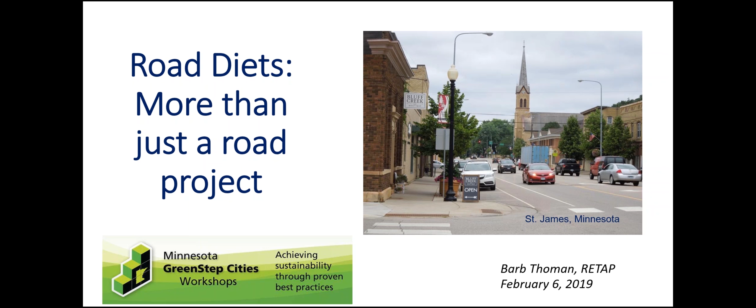We are going to hear quite a lot from Leuer about what a road diet is, but just very briefly, it's any time you're either reducing the number of lanes or reducing the size of the lanes, shrinking down the configuration of the road. The ones we're going to really talk about and dig into today are the 4 to 3 lane conversions, where you're going from 4 lanes typically to 3 lanes, so 1 lane in each direction and a two-way center left turn lane.

And most of the roads where this treatment makes the most sense are your lower speed roads. So the 30 to 35 mile an hour roads, 25 mile an hour if it has a bike lane, but in a commercial corridor, a small town main street.

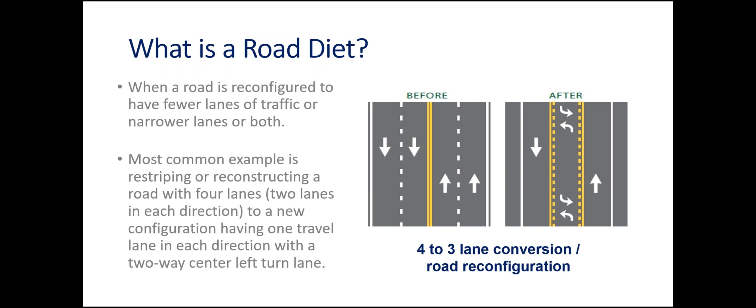So we've probably said the phrase road diet 10 or 20 times already this morning, but I'm going to try not to say it again, because who likes a diet? Nobody likes a diet, and a diet conjures up an image of taking things away, of scarcity, and what we found around the state, in Minnesota at least, is it's not been a helpful term. Up in the northwest part of the state, MnDOT District 2, the phrase road diet was really almost a toxic phrase in the public engagement work up there.

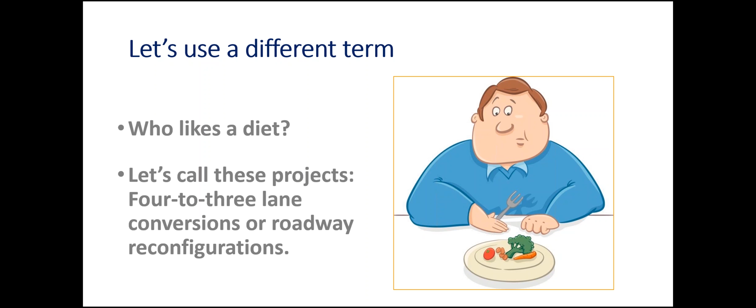So we're going to try to call these, using a more descriptive term, a 4 to 3 lane conversion or a roadway reconfiguration. I think it was actually Jack Broz from the city of Richfield who was the first person to say road diet is not a helpful term. So, all right, change our language. Moving on. Oops, that was not what I wanted to do.

Well, the reason I'm so interested in these, and the GreenStep Cities program is interested in these projects, is that these road conversions have such a great array of benefits. So enhanced safety for all users - that's drivers, that's people walking, that's people biking, that's people using some kind of mobility assistance device.

In small towns where a road is 4 lanes and you're trying to cross 4 lanes of traffic, the road can become a barrier to people in your community getting from one side of the street to the other, getting from home to shopping, getting from the bus stop to school. And so we're seeing that these projects have a great benefit in just getting more people out walking in your community and in a corridor.

And the other thing that sometimes we don't think about, but Phil did mention, is this idea of increased economic vitality. When people feel safe walking and biking, when there is a place along the sidewalk or a wide enough sidewalk for social interaction, for shopping, for mingling, your business district often does better.

And so we'll hear some great information from a couple of greater Minnesota cities where the 4 to 3 lane conversion has really helped to revitalize Main Street.

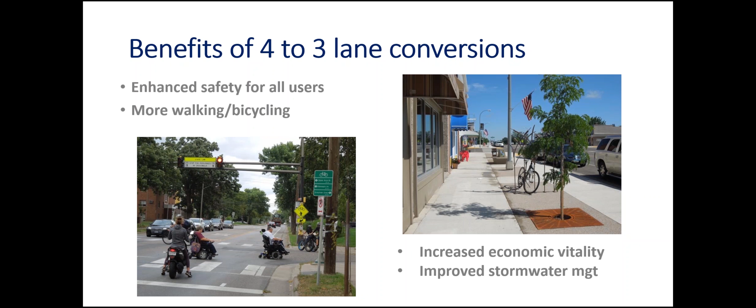And then finally, many of these projects, if they're more than a mill and overlay, if they're a full reconstruction of the road, often provide the opportunity to redo utilities below the street—new water infrastructure, sewer infrastructure, stormwater infrastructure. So many communities, when they've done one of these major roadway reconstructions, really think about what they want to do differently with stormwater to improve a wetland area, a stream, or a lake in town.

So this is my final slide before we really dig into the nuts and bolts of a road diet, or a 4 to 3 lane conversion. See, it's very ingrained—so used to saying it.

I think what we found is there are a lot of candidate projects out there across the state, and there's probably a project in your community, in your city, on a county road, on a MnDOT road. And that's because for many, many decades, when we thought about road projects, we thought bigger, faster, better.

We want to keep the cars moving. We want to make sure that they don't have to slow down at rush hour. And what we found is in some of our corridors, the amount of traffic that we thought was going to occur in the future hasn't come to pass.

And I looked at the MnDOT website the other day at the vehicle miles traveled and their estimates of traffic across the state. It was really quite surprising to me—vehicle miles traveled per person has been flat for nearly 15 years.

So that's the amount of—if you take the population of the state, you look at all the miles that are traveled in the state, and you make that division, you'll find that the number really has not changed. It might have bumped up and down just a little bit, but it's pretty much flat.

And the growth in traffic, the vehicle miles traveled overall in the state, is up less than 1% a year over the last dozen years. And so I remember when we were doing planning and evaluating projects when I was on the Metropolitan Council's Transportation Advisory Board, we were using a growth in traffic number that was over 2%.

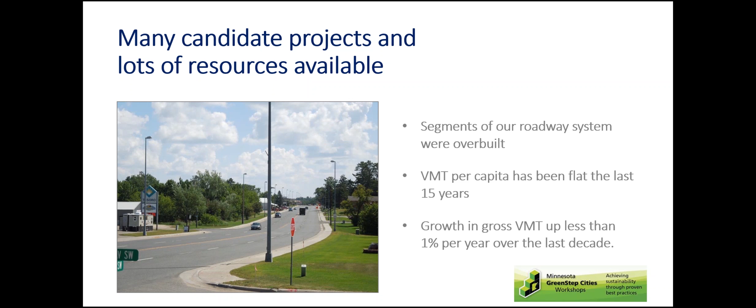So anyway, something to think about as you watch these presentations. So I'm going to move to our first two speakers.

Next up, talking much more about the nuts and bolts, is Derek Leuer, who's a traffic safety engineer at MnDOT, the Department of Transportation. He's going to talk about operation, safety, and performance. And right after him, we have Greg Pace, who's a design flexibility planner at MnDOT, and he's going to talk about performance outcomes, flexible design, and context.

So, next up. All right. Welcome—this is your clicker. Thank you, Barb. The advance, and... all right, the arrow is missing. Am I in view of the camera? Am I good? You're fine.

All right, sounds good. All right, well, good morning, everybody. My name is Derek Leuer. I work for MnDOT in the Office of Traffic Engineering. I'm a traffic safety engineer. So part of my job is that we administer the crash database for the DOT, so we get access to all the crashes. We do a lot of crash analysis.

The other big part of what we do is we are in charge of the Highway Safety Improvement Program, which is a federal core program that has about $36 million a year, and we help divvy that out to the MnDOT districts, counties, and cities to help implement safety projects across the state.

One of the big things we've been promoting and trying to get the word out about, and trying to help support Barb and some of the other states and counties and guys like Jack out there, is the 3-lane road reconfiguration. Barb brought up the connotation of the diet, and I was actually going to share that same thing. I was at a Federal Highway Administration workshop, and one of the guys talking about 3 lanes said they went to a city and proposed the 3-lane road diet, and it blew up on them because everybody in that town had a negative connotation of a diet.

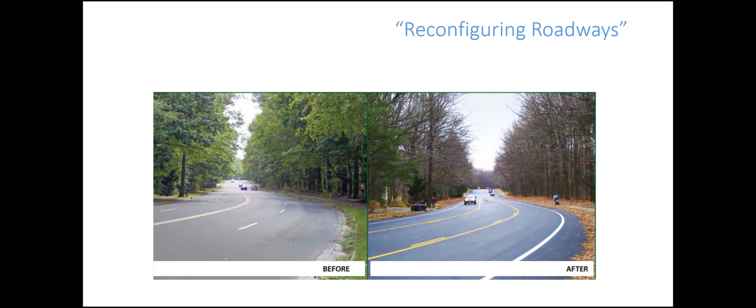Nobody likes going on a diet. So I'm probably going to repeat a few things Barb already said, but this idea of a diet is real. So if I say road diet, I'm trying to include road reconfiguration as well. It's just that essentially redistributing the pavement is really what we're going after.

So what is a road diet? Road diet, road reconfiguration is kind of a vague term sometimes, a blanket term. Typically what we're probably talking about most often is this idea, as Barb mentioned, of going from 4-lane undivided down to a 3-lane cross section, 1 lane in each direction, and a center left turn lane.

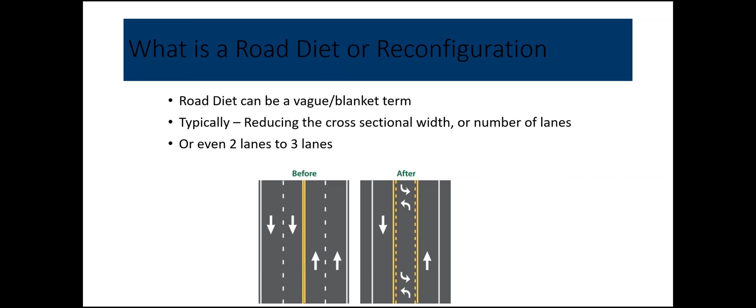Typically, the idea is reducing the cross-sectional width, or generally the number of lanes, going from that 4 lane down to 3 lanes, 2 in each direction down to 1 in each direction. But sometimes it can even be 2 to 3 lanes. This 4 to 3 lanes is the most common you probably think of.

But there's also some cities we've gone through and looked at that have a nice wide cross-section used for parking, skateboarding, biking, motorcycling, horse riding, buses, tractors, semis, cars, plus sidewalks on top of it. Some areas we've gone through have super wide cross sections, and they've only got 2 lanes, but we've made the suggestion to maybe use 2 of those lanes, then add that 3rd lane to eat up some of that extra space.

There's a lot of different things you can do. There's also this idea of just going 3 lane to 3 lane, where there are some 3 lanes built probably in the 70s or 80s that have really wide lanes and really wide cross sections. We can even slim those up sometimes too when we come through and reconfigure.

And now this is catching on in some spots: 5 lanes to 3 lanes. Barb talked about this idea of traffic projections, where we project growth for the next 30 years expecting 35,000 vehicles on a road eventually, but come back 35 years later and it's still at 10,000 or 5,000. We can go from 5 lanes down to 3 lanes. We don't need all those 5 lanes, we really only need 3. So can we take some of that width out, take away those lanes, and still have a cross section that works really well for what we need?

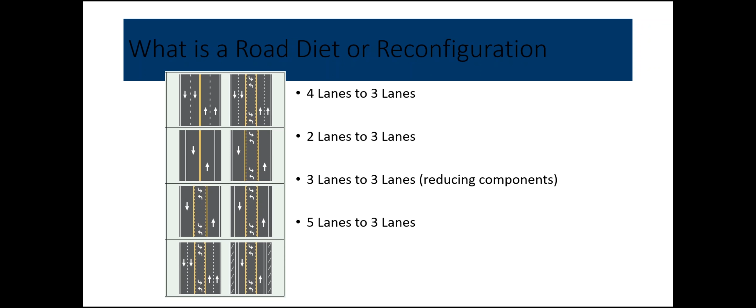So why consider this? We talked about what you can do, but why should we do this? I'll be honest, I took this right out of the Federal Highway Road Diet Manual: road diets have the potential to improve safety, convenience, and quality of life for all road users. And I'll emphasize 'all' - that's important.

Road diets can be relatively low cost and planned in conjunction with reconstruction or simple overlay projects, since applying road diets consists primarily of restriping. So really, we've already got this section out here, we've already got that width, it's just a matter of redistributing the pavement.

I'll talk about safety here, but I just want to highlight this. One of the big benefits of road diets is that if you're driving down a 4-lane cross section like this and you're just trying to get through, how often is it that somebody stops in this lane to turn left? You've essentially decapacitated that lane while that person waits. If traffic volumes are heavy enough, they're going to sit there and wait a long time, and nobody can use that lane. Everybody starts jogging across, switching lanes, jockeying for position because nobody wants to stop and everybody wants to keep going.

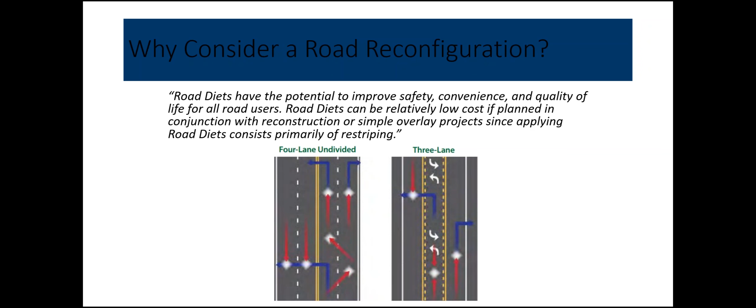So that's one of the big reasons why safety performance increases when we do this. Instead of jockeying for position or incapacitating this lane, people move over, they're out of that lane, and they can wait there safely for the right gap to make that maneuver. And when they do turn left, they've only got to cross one lane instead of two.

One of the other metrics we use to know we're improving safety is this idea of reducing operating speeds. A lot of 4-lane undivided cross sections in urban areas typically have an operating speed somewhere between 40 and 45 miles per hour. Once you go down to the 3-lane, you typically see that drop to about 35 miles per hour, sometimes even lower. Combine that with narrower lanes, pulling in shoulders, adding medians at strategic locations, and you can see big reductions in operating speed.

If you're a pedestrian trying to cross this road, not that getting hit at 30 miles per hour is a great thing, but it's certainly better than getting hit at 40 or 45 miles per hour.

This idea of reducing the chaos - when people are switching lanes and jockeying for position trying to get around each other, it's this turbulent chaos on the road, and it lends itself to rear-end collisions, side swipes, pedestrians getting hit, people going off the road and hitting other items. When you go down to the 3-lane, you reduce that chaos. There's just less chaos.

Another big thing: shorter distance for people to cross. When you have to cross 4 lanes of traffic going 45 miles per hour, that's quite the distance to go. With the 3-lane, you can actually use that third lane as a refuge if you need to - you only need to cross one lane, wait if you have to, and then cross that third lane. So it's a shorter exposure.

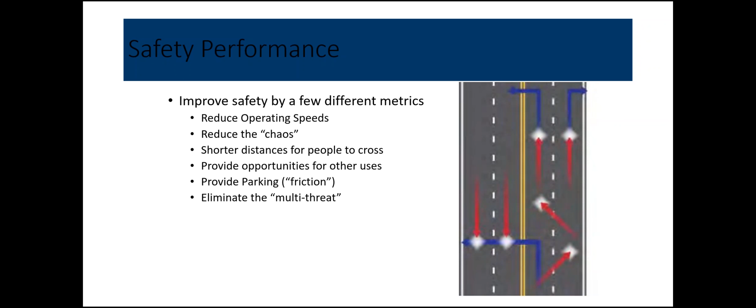And when you go to the 3-lane, you get rid of this thing that's called the multi-threat, and I'll explain that in a little bit here.

So what have we seen at the state? When we looked at our trunk highway network and where we've got 4-lane undivided versus 3-lane cross sections, we've noticed a difference in the number of crashes. FHWA reports a 19 to 47% reduction in crashes on 3-lane sections versus 4-lane undivided. 47% is a pretty substantial number, a big reduction in crashes for just moving some paint lines.

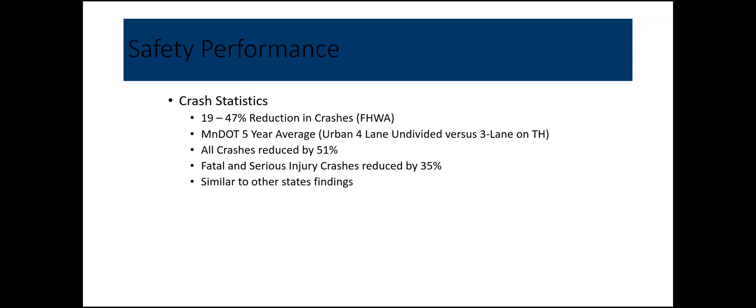When we looked at urban 4-lane versus 3-lane sections, we've seen crashes reduced by about 51%, which is pretty substantial. More importantly, fatal and serious injury crashes, which is our state performance measure for safety, we've seen a reduction of 35% from 4-lane undivided to 3-lane on Minnesota trunk highways. This is pretty similar to what other states have found. We're not outside the normal band of what other states and the federal highways have been finding. So it seems pretty consistent that if we're using these in the right applications, you'll see the crash reduction and the speed reduction as well.

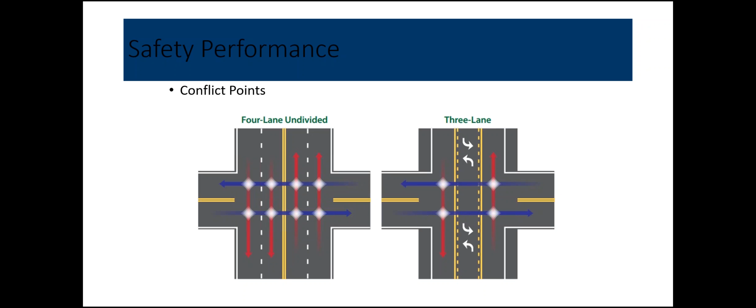Some of the reasons for that relate to this idea of conflict points. On a 4-lane undivided at an intersection, you've got at least 8 conflict points. If you start counting left turns, right turns, rear ends, and those types of things, you probably explode up to, I want to say, 42 conflict points. When you go down to the 3-lane, you greatly reduce those total numbers. So every conflict point you get rid of is an opportunity for a crash removed.

So there's some speed and operations management benefits. It can improve flow, crossings, and manage speeds. It can improve all of those. The biggest benefit is we get rid of that — we can get those left turners out of the way. Usually the left turners are the ones who take the longest time because they have to wait for the traffic approaching them.

It reduces the distance and complexity of crossings, and as I mentioned, reduces speed differentials. One of the big things traffic safety people tell you is that speed itself isn't what's dangerous, it's speed differentials. On a lot of these 4-lanes, if it's posted at 35 miles an hour and everyone's really going 45, because that's what the road is telling them to do, you'll always have that one person who follows the speed limit, going 35 while everybody else tries to get around them because they're going too slow. That's when speed differential creates a lot of problems.

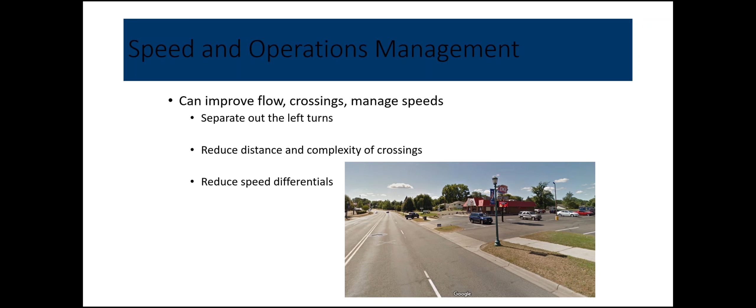And if you're a pedestrian trying to cross this road and somebody just went by you at 35 miles an hour, you gauge how to cross, and then somebody comes along at 45 or 50 — now you've got problems because the brain isn't adequately wired to know how to cross that road until it's too late. So when we get down to that 3-lane, we get more consistent speeds, lower speeds, and it's easier for pedestrians to cross, and for vehicles pulling onto the road as well.

So where do these work? Certainly we can't just go restripe I-94 into a 3-lane, that doesn't make sense. There are places where it works well and places where it may not. Typically, urban corridors, urban streets, and city streets are really good candidates. They work well up to about 18,000 vehicles per day, which is a pretty high substantial volume. Seattle has put out guidance that they're willing to go up to 25,000 vehicles a day. I haven't personally seen how well that works, but Seattle's comfortable putting that number out there, and as far as I know, the world hasn't exploded, so it could work.

Even for MnDOT, 18,000 vehicles is a lot of your streets — it's probably most cities, most counties, that's probably 100% of your roads. Even at MnDOT, 90% of our roadways fall into that category of 18,000 vehicles a day or less. So even a lot of our roads can benefit from road diets or road reconfiguration.

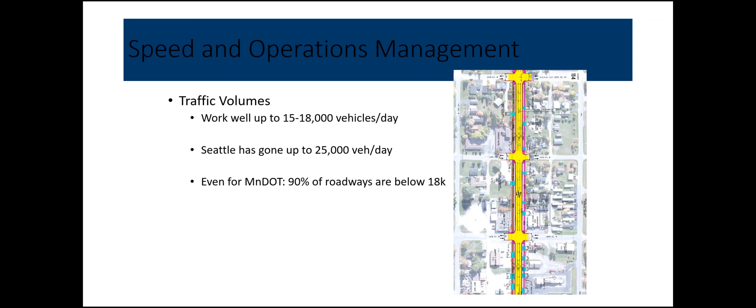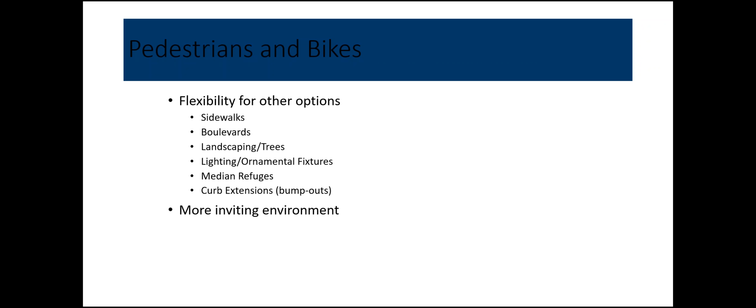So as I mentioned, pedestrians and bikes get flexibility for other options. We take away some of that pavement, we can redistribute it, but we can also do things now like sidewalks, boulevards, trees, lighting, ornamental fixtures, median refuges is pretty big, and then curb extensions as well, which are these bump outs you can put on the intersections to help narrow down things to make people slow down. And then just overall a more inviting environment for people to enjoy.

So this idea of multi-threat - this is kind of one of the big reasons why pedestrians really benefit from a 3-lane. So if we have a 4-lane undivided section, what happens is you got people driving down the road and this guy wants to cross, right? So he kind of makes that gesture that he wants to stop, and you get a good driver every once in a while who will stop, right? And they stop and they wait for this person.

Now this person starts crossing, and they sometimes are under the assumption that if this guy stopped for me, everybody else will stop for me, right? And what often happens is this person starts crossing, and this person is close enough to where they've completely blocked all the lanes behind them. And this guy here could either just be going along and not knowing why this guy stopped.

You know, people do a lot of stupid stuff on the road - 'I'll just stop on the road, I'm just going to go around it.' So either they're coming along not paying attention, or even sometimes they're coming along and they see this guy stop, they jostle over to this lane and they fly through.

And that's right when this person has walked into that lane. So the person does not know another vehicle is coming, and the vehicle that's approaching does not know that there's a reason why that vehicle stopped. So this is really, if you read a lot of pedestrian crash reports that have happened on 4-lane sections, this is the story. This is what happened.

So when we get down to the 3 lanes, you can't have this anymore. People will not jostle into that 3rd lane to go around anymore. So it provides a better environment for the pedestrian as well. Anybody have any questions on that?

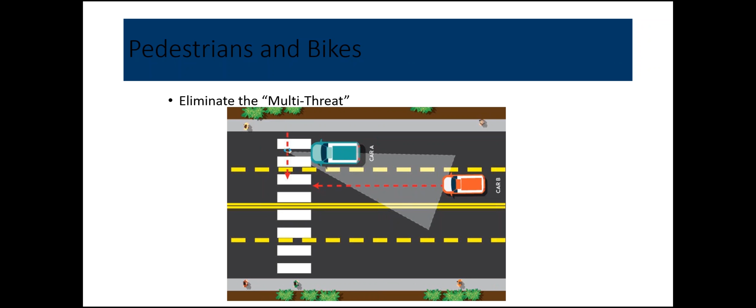Totally. Okay, so I'm just going to talk quickly about some costs and opportunities and some funding options as well.

The nice thing about road reconfigurations is that they can be extremely low cost. It can really just be a matter of moving your striping around. It can be a matter of just hiring a contractor, or even your own maintenance forces, going out, grinding up the existing pavement markings and putting down new pavement markings. It really can be that simple. But it's not always exactly that simple - it may require moving some signing around to better position the signing.

The other thing too is if you're in a signalized corridor, you sometimes have to move those signal heads to a better position over the lane. So there are some other costs that can come with it. Sometimes it is just as simple as moving the pavement lines, but it can be more.

Typically at MnDOT for planning level costs, we kind of estimate about $50,000 a mile to grind up those pavement markings, put down new pavement markings, and then do some of that signing and striping that might have to come along with it too. If you got turn arrows in the road, you got to grind those up, you got to move them around. So there's just some cost associated with that.

That's kind of the high level cost we use. And then for every signal that you cross, plan on adding about $40,000 per intersection to move those signal heads. Another part of that too is going from 4 lanes to 3 lanes, the way the traffic moves has changed, so you may need to retime your signals for better operations - but that's kind of included in that $40,000 per signal cost. So a couple mile roads with a couple signals on it, maybe $200,000. Certainly a realistic cost, not insane.

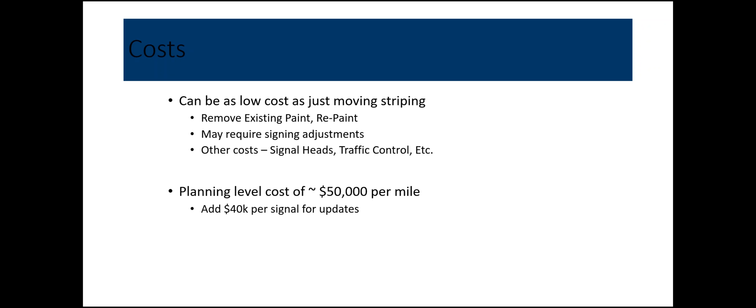Some other opportunities you should really think about: if you have a mill and overlay coming up, which is grinding up that top inch of pavement and putting down a new inch of pavement, that can be one of the best opportunities because you have to put the pavement markings down anyways when you're done. Now it's just a matter of saying, where do I want to put the pavement markings?

So if you're doing a mill and overlay, the cost of going from a 4 lane to a 3 lane is pretty much incidental. The pavement rehab needs to occur anyways, and usually it can be done with pretty short planning and engineering time. The project I helped out on was Lake Elmo, Highway 5 out in Lake Elmo.

We did a road safety audit the year before a chip seal, and we recommended going from the 4 lane to the 3 lane out there. For the maintenance forces that were going to do it, it was simple enough to just say, instead of putting the yellow line here, we're going to put 2 here. They did it in about a week - they switched the plans out for what they were going to do.

Barb mentioned reconstruction. If you're doing a reconstruction where you're actually tearing out the old road and putting in a new road, this is really the opportunity to do the right thing, to really change how that road is going to be used and operate. Don't miss this opportunity - this is the chance.

This is the time to do some more substantial things too that are probably pretty much at the same cost of just putting back what's there, because you need to put back sidewalks, you need to put back curb lines - it's just a matter of where you're going to put them. So these are more substantial improvements like sidewalks, boulevards, medians, bump outs. You could probably do these all for about the same cost as doing the reconstruction anyways. It's almost at no cost, just because we're putting things in different places.

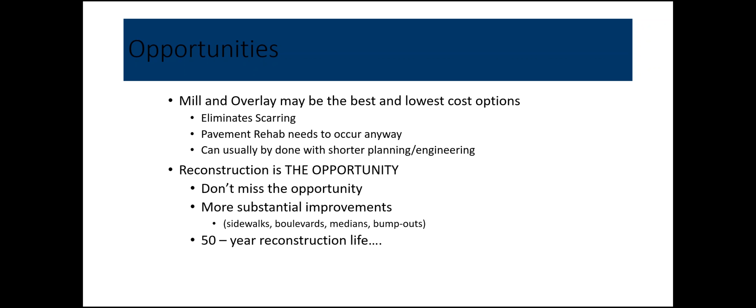Some other funding options as well: you can kind of do these as part of your normal capital improvement program within your city, county, or state. Mill and overlays are every 7 to 10 years - those can be good opportunities. Other pavement rehab things can be good opportunities too. There's a federally administered program called the Transportation Alternatives Program that may provide some good opportunities for funding as well.

The program I help administer, the Highway Safety Improvement Program, we have funded 3-lane conversions before, but typically it's been mill and overlays - we just cannot afford to fund a full reconstruction. So we have limited funding, but it is an opportunity we are looking to leverage. If you're doing a mill and overlay and would like to get a little bit more money into your pot, a 3-lane conversion could be a good opportunity that we would certainly be willing to look at, at least.

Some real quick resources as I'm running out of time. Sonia Pfeiffer at MnDOT, I work right across from Sonia. Sonia is our bike and pedestrian safety engineer. She's been going out across the state trying to find good opportunities to do things like this. So if you have questions, she can be a good resource.

Will Stein at the Federal Highway Administration is a good contact as well. There's this FHWA Road Diet Informational Guide that has a lot of good information. I'll be honest, I stole most of my presentation right out of there because it is a good guide. We have a little website that's all about road diets, and Barb's case studies are on there as well.

And there's this really good little video on Vox right now about the 3-lane, it's kind of the history of the 3-lane and how they work really well. They even talk about some of the reasons why we went to 4 lanes in the first place and why it's not working, and then why the 3-lane is a good solution. So it's a little 6 or 7 minute video, but it's pretty good.

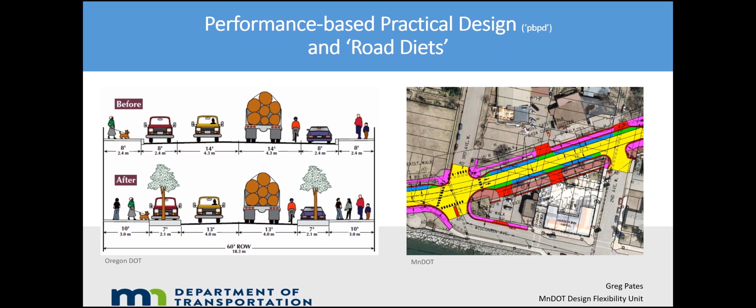So PBPD is the shorthand for performance-based practical design, and we say we use a complete streets approach. Basically, this is about getting the best bang for the buck at all levels across the highway system, from across the state to across town to down the street and probably down the alley in the case of communities. The second part of this is about trying to achieve desired outcomes. Derek and Barb talked about some of the outcomes of road diets, right-sizing, safety and performance outcomes for everybody, not just for people when they're driving cars.

Part of the approach that we talk about and are using in training that we do, both at the state level and helping people at the county and local level, is talk about flexible design using a complete streets approach. I'll get into that a little bit more. But keep in mind that what I'm talking about here, even though it's maybe more state-focused, really is applicable at all levels and all jurisdictions.

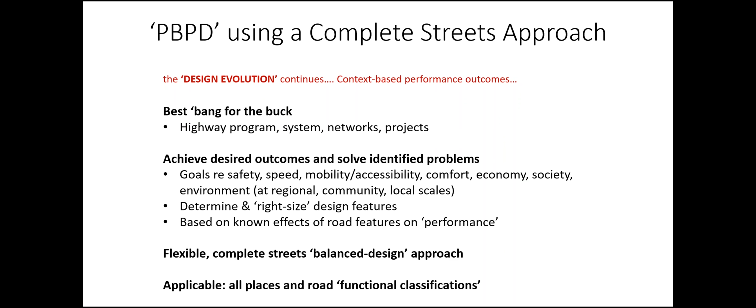So, performance outcomes—here's one way of looking at it. Part of what I'm working on right now is helping to revise planning and design guidance at MnDOT, including updating the MnDOT Road Design Manual. One of the things we're trying to help with is to broaden the understanding of what performance is about and what outcomes we're trying to achieve, using that as part of the framework for how we do things now and in the future.

Especially from a complete streets standpoint, the outcomes on the left come almost straight out of the complete streets legislation. We're trying to make it so that people of all ages and abilities can get to their destinations reasonably safely, efficiently, and comfortably, no matter which way they choose—whether they want to walk to where they're going, drive their car, or whatever it is.

And then, based on Minnesota statutes, there are also other goals that help us dive deeper into this, or help set some priorities in terms of what some of the priorities might be in these outcomes we're trying to achieve. At the bottom, but not least, includes things like increasing walking, biking, and transit by giving highest priority to modes with the greatest people-moving capacity.

So I talk about this sometimes as, at least for MnDOT, this is our job description. In a sense, it's like the short checklist for people when they're scoping projects: is your project going to achieve these things? Can you check off the box and say yes, this project will do that? If you can't, then you probably need to circle back and think again about what you're doing and why you're doing a project to begin with.

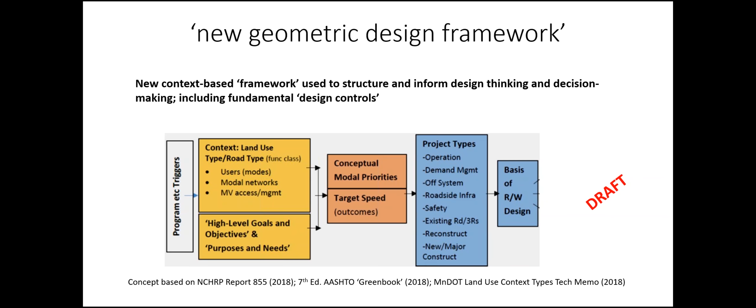Lastly, just a few considerations. It's probably fresher in people's minds right now with the snow and ice—operation and maintenance is a big part of trying to achieve outcomes. In the middle of summer when it's 90 degrees, we don't think much about snow plowing, but it's an important factor in finding the balance in best serving users and achieving outcomes.

Again, context is king. I've talked about how AASHTO and MnDOT are embracing and using this. The three things I think are important to consider are trucks, tractors, and snowplows. They all provide challenges, especially for state highways in urban areas and communities. Trucks and tractors do need to get through, but they don't need to get through quickly—they don't need to be the king of the road in a sense.

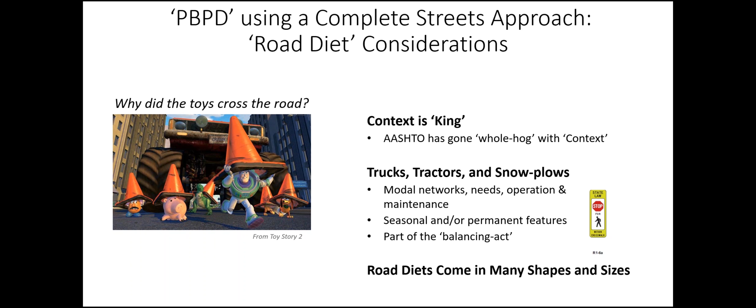Again, my name is Jack Broz, transportation engineer for the city of Richfield. City of Richfield, if you're not aware, we're not a big community—36,000 people. And those of you in a city of 36,000, you have a city engineer, you maybe don't have a transportation engineer. So I'm going to be talking about several things unique to Richfield, more holistically.

By the way, this is our Public Works logo—sweet streets, better roads, better Richfield. Do you have a sense of our mission at Public Works? It's much more than the street we're talking about, it's about the city itself. So I'm going to talk about how that's changed our entire vision of our community, how we get there, what is our vision of Public Works as part of that puzzle, and I will get to a three-lane street.

I don't know if any of you read City Pages—last year they listed Richfield as the best burg. Two years running, we're the hottest housing real estate market in the Twin Cities. The hottest, Richfield.

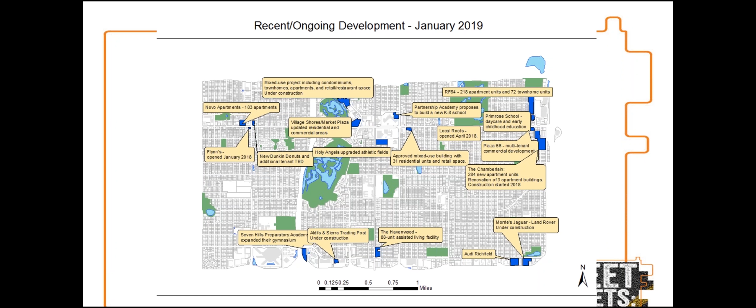So as we redefined who we were at Public Works, one of the things we talked about is, as a city, what's their vision? So we basically stopped all work and engaged the city. We went through a visioning process looking 50 years ahead—that's a number you should all talk about. It's 50 years; the roads we were going to reconstruct were going to be 50 years in the ground. So we brought together the council, our transportation commission, adjacent cities, all our commissions—human rights, arts—and had a visioning session.

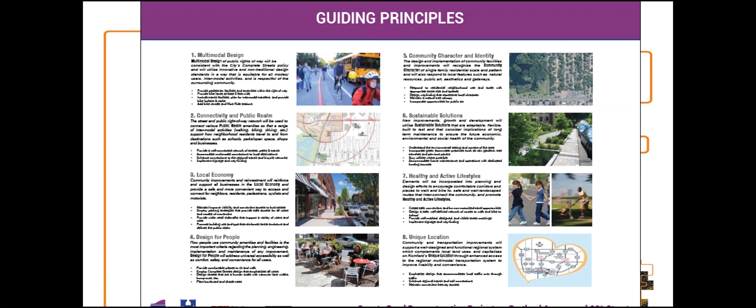Out of that came what we call the guiding principles, and these were then ranked by order. Let me show you what the ranked order looks like. Number one, multimodal design—the most important thing to advance the city towards its 50-year vision is effective multimodal design.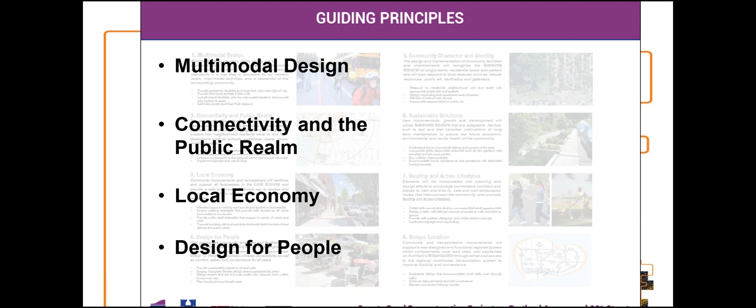Now, I'm the engineer, it gets a lot fuzzier at this point—I'm not the planner. Connectivity, the public realm, local economy, designing for people, community character and identity. Inside of there is public art, sustainable solutions, healthy and active lifestyles, fostering our unique location, which is next to the airport, minutes from downtown.

So as I talked about a second ago, the Transportation Commission. In this process, Greg talked about MnDOT. By the way, shameless promotion, there is training MnDOT offers on complete streets that I can walk you through in a more methodical way.

It's a process that methodically starts with taking your technical analysis, going out to the public, talking about the problem first from their point of view, not even designs. Our second open house, all we bring is a problem statement, and we ask, can you please verify that? These are maybe the things we could do. We don't even have a layout.

Then we bring in options. You weigh them, compare them, contrast them, and finally get to a preferred alternative that you bring to council. But in between, we have a commission, appointed by council, that evaluates all our work.

And you may not be able to read this, but it says the Transportation Commission recommendation to council. Staff does not make the recommendation. It's a citizen commission that makes the recommendation after all of that vetting.

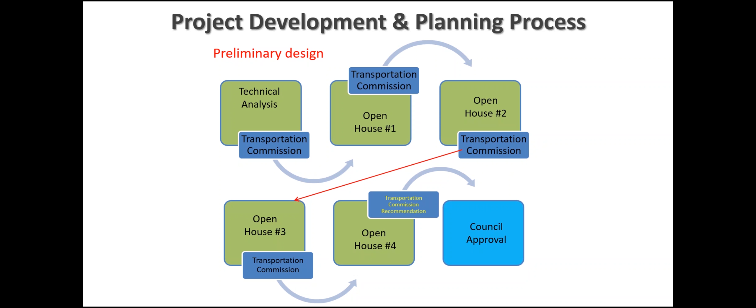So we redefined our process to this. In detail, we use checklists to achieve the multimodal goals. This is just how we look at pedestrian modes. I'm the engineer, so we make a nice checklist. When we look at a design, which is going to be better for pedestrians? Here's a way to measure it.

I'm not going to read them all, but speed of traffic, cars, offset to traffic, crossing distances, number of lanes, median refuge. There are things you can compare A or B. If this one's got a median and this one doesn't, it helps you make a determination technically to advise the Transportation Commission how to decide, because it gets pretty messy.

So we have this for every mode. And methodically, by the way, we start with pedestrian. So everything you heard today was car, pedestrian. We inverted it: pedestrian, transit, bicycle, and car.

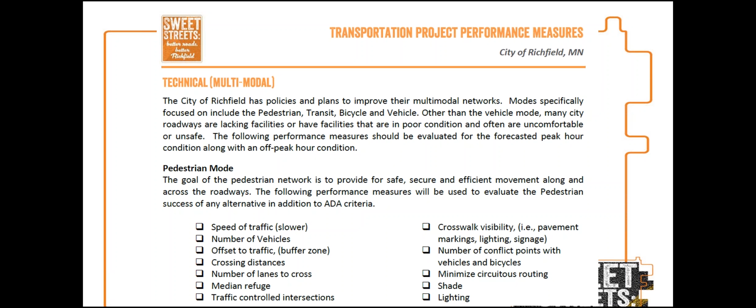So let's talk about pedestrian. I had a consultant who just finished this pedestrian master plan for the city of Richfield. He guaranteed that this is unique across the country. Our pedestrian plan is based on destinations and people—destinations and their value, people and their demographic need, age.

So you start to see this heat map that kind of shows the demand. We don't count how many people are walking across the street and make a determination on whether we should save their life or make it better. These are the people—you've got all the socioeconomic data and the destinations.

And that kind of sets the table when you do a project, to say this is an area of poverty, this is a county road, and on the other side of the county road is the park, the county library, the playground program that has the free lunch for that demographic.

Now, that county told me there's not more than 15 crossings per hour, so we can't do anything—because that's all they look at.

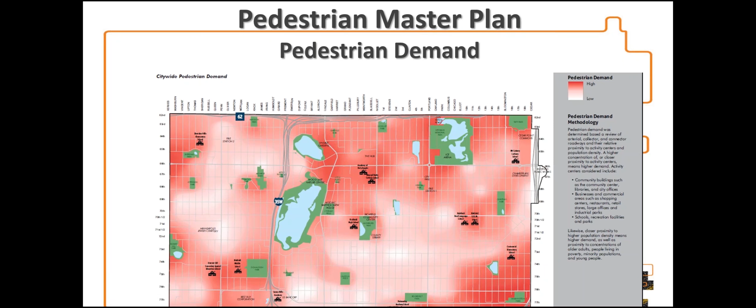Well, we talked about speed. I love the AAA—this is from a AAA study that was done. Speed is so important when you talk about pedestrians.

So close to the Capitol, I'm just going to go political for a second here. But if you look at this chart, going up is the risk factor, and speed is across the bottom. They plot a dotted line for something like a pickup, a solid line for a car. So if you got hit walking or biking at those speeds—I use this on all my designs.

So for example, in this one study, we did our traffic counts, and the speeds were 35 to 38 miles an hour. If you're walking down that street, using the chart, you have to decide if you want to get hit by a pickup or a car, it's a range. But if you get hit, there's above a 50 to about 80% chance that you're going to have a severe injury or worse.

So should we do anything? This is how I work—I put that in front of people and ask, should we do anything, or is it fine as it is? Hopefully we do something, right?

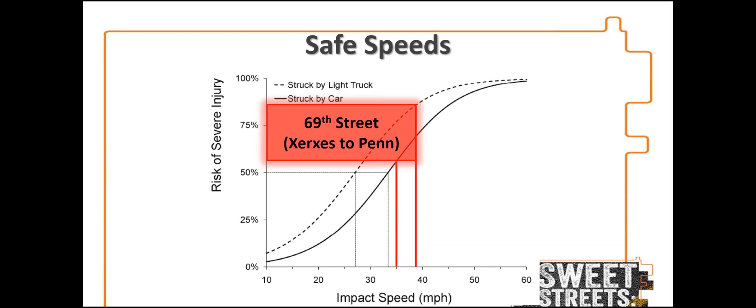People count. Now, I apologize, this is not the bicycle master plan, this is transit data from Metro Transit. They serve us, we're so lucky, we don't have to provide that as a city cost. The size of the circle is your boarding data.

We have here plotted sheltered or unsheltered. We have bus stops that currently have well over 100 people boarding that are unsheltered, on days like today. Going back to being political, Metro Transit is struggling. Throw money their way. How do we use it? They tell us they can't deal with these shelters.

Now, let me tell you, they have been responsive. That red line represents transit use, 36,000 people. We have anywhere between 1.5 million to 2 million boardings a year. They saw the use along this corridor and upped the service to high frequency. It's the only one outside Minneapolis. Every 15 minutes, you don't need a schedule. It's like the elevator, it just goes back and forth from Southdale to Mall of America. So they've responded based on ridership to amp this up.

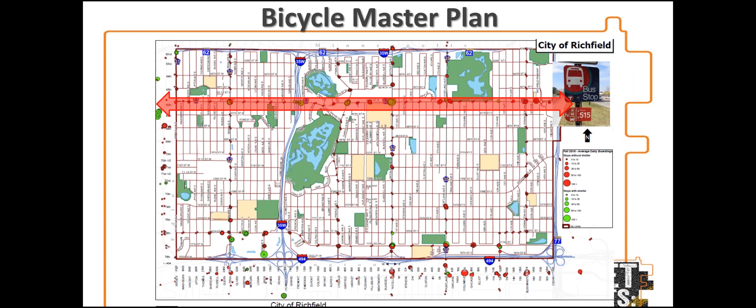The Orange Line comes down 35W, the D Line will come down Portland. It's an important part of transportation. I'll get to that in a bit.

So we don't have a big tax base. We did our bicycle master plan, and we're talking about 50 years. When are we ever going to get to our residential streets? How are we going to do this? There was no money to be had. But somehow, I'll leave that as a hanging question. How did we get there?

We have now, the blue lines represent all the destinations driving the bicycle network. So our priority routes were established. The blue lines are the ones that are now implemented. The green lines are yet to be, but soon will be, in the next few years they all will be.

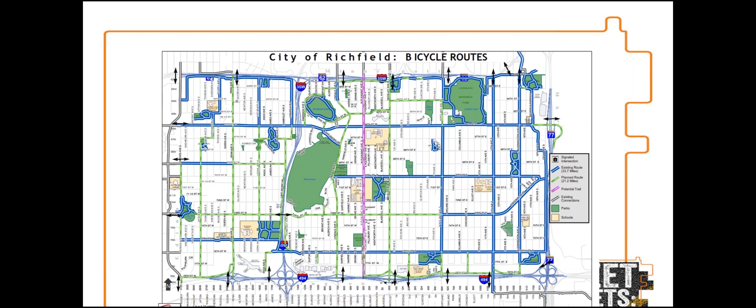So what are we doing in Richfield, right? Here we go, 4 to 3 lanes. So there's some uncertain capacity of a 3-lane. This is the engineering part I find hysterical, the engineers can't tell you any closer than, well, 15 to 25,000. I don't know, it kind of works.

Depends on how much you want it to work. This is what I'm trying to tell you, how much do you want this to work, and why? In our community, I'm kind of lucky because we're around 12,000, so we've done a whole bunch of 3-lane.

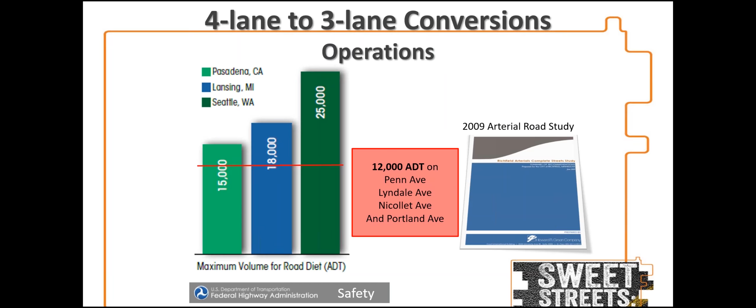So now let's take a look at this. This was a 4-lane undivided. We're by the airport, so I kept concerning myself that we might land a few planes, it was kind of a big wide road. So we had federal funding on this to reconstruct. This wasn't all the low-hanging restriping dollars, we're going to reconstruct this guy.

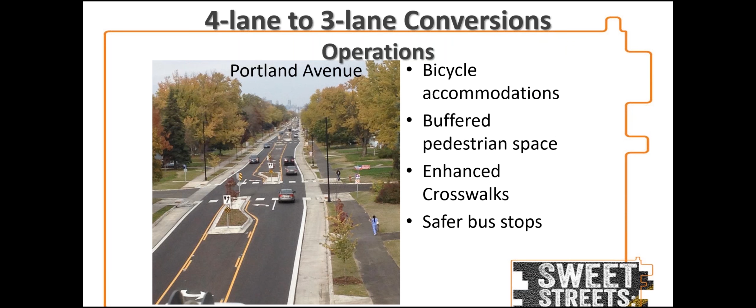Now, it's not all good, it's all trade-offs. So I don't want to give you the easy answer, there's nothing easy about this. It's trade-offs. And I'm going to talk now about cars. It is going to take you longer to cross the street because everybody's in a single file line, back into the old two-lane road days.

Be upfront about that. Now, we're a grid, so you've got all sorts of options as to what to do to fix that. That's the hard part to be aware of, especially if you're going to turn left. So crossing and entering the street from a side street is a car negative, for the benefits of everything else that you're going to do.

You have to put it in the long-term vision. How do you think we get to all that redevelopment? What's going on in this town? That's what's at risk. And yes, we slowed the speeds down.

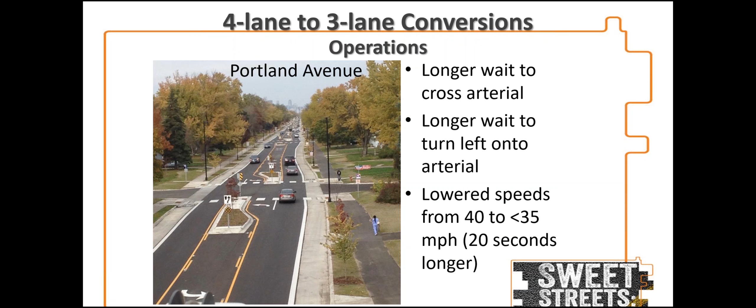In doing that - this is Wayne. Wayne said he changed his life. He's in a motorized wheelchair, he lives on Portland, and he now just feels free to go out and move. He loves to get outside. And now he just goes up and down Portland, crosses the street, comes back, crosses the street, just because he can now. And it's like a freedom for Wayne.

We engaged, we do this on all our projects now. We got the great palette, we learned from St. Paul. Steal the best ideas, share them. So we have our Arts Commission. Right now in the middle, if you're a poet, go online, find the Richfield Arts Commission, submit a poem. Because we've got a lot more sidewalks to fill.

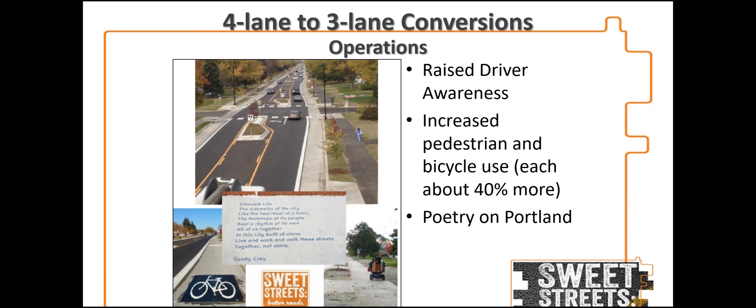And so that's the kind of thing that we do. I'm just going to end and talk a little bit about the feedback loop, because this is not just Public Works Engineering by themselves. I talked to maintenance - they'll tell you the benefits of these designs. Police, jokingly or not, talk about revenues being down.

Portland has a cop shop. You know how easy that used to be, to sit at the cop shop and just write tickets? They can't do that anymore. Fire, they love our roundabouts. They get kind of squishy on some of the narrower median sections.

Our parks - we went back to our bicycle routing, all the parks, everything's connected. That's how we started. Everything's got to be connected for the people.

Economic development, I showed you that slide. They have never been so busy. Never been so busy. And again, I have a checklist that I can prove over and over.

So I'll just wrap it up and say, what we did is we were smart, but we sold it. How did we get the authority? Where are we getting our money? We sold better engineering, more effective. It was obvious as we started doing our first projects. So we hired a marketing firm. We branded ourselves. We embraced this new vision, Sweet Streets, better roads, better Richfield, and we sell ourselves.

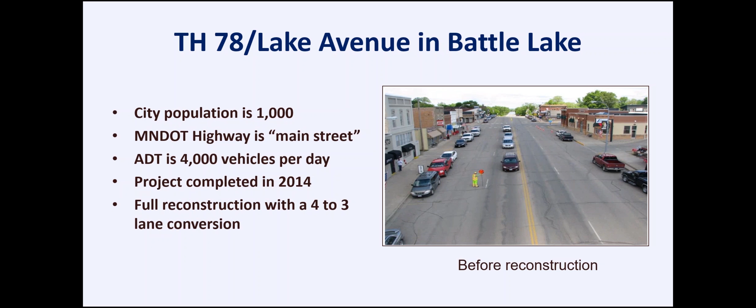So the city of Battle Lake in 2009 was really struggling. They had a lot of vacancies in their downtown and were concerned that school enrollment was going down. They have this wonderful state park, Glendalough State Park, near the downtown, maybe 5 or so miles away, and they were told it was in danger of being downgraded because attendance was so low. So the folks in the community came together and said, just like Jack would advise, we need a community vision here.

We're struggling, and we need to think holistically about what to do. So they put together a community vision plan, and one of the elements of that plan was to redo their main street. They were told by MnDOT that it was about time for a mill and overlay on their downtown street, and after doing all this planning, they said, we don't want just a mill and overlay.

We have a vision for something bigger. We want a full reconstruction of our downtown because we want to improve stormwater management before it gets into our lake. We want to somehow have a downtown that feels more connected to the state park, that enables them to connect downtown to the park. And there's a lot of tourists that go through Battle Lake, and they want them to stop and have more activity in the downtown all the time, but especially during the summer months.

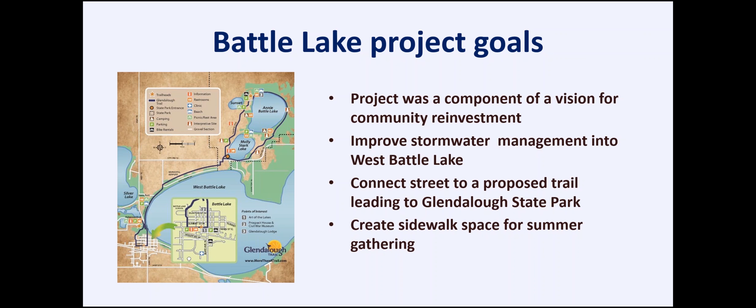So they went to MnDOT and were able to convince them to do a full reconstruction on this road—Trunk Highway 78, Lake Avenue. It's called Lake Avenue in the city; they don't call it Trunk Highway 78. This is the road in 2013, and this is the road as it was reconstructed in 2014.

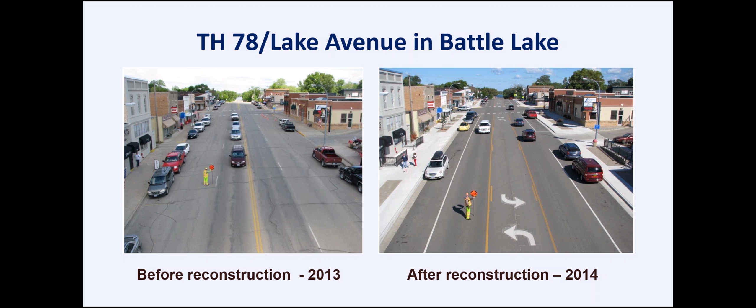And so we have good information now on the outcomes from the project. They've seen fewer crashes and improved visibility in the downtown. The police department says it's so much easier now for people to cross the street because they have these pedestrian bump outs, and because there are only 3 lanes of traffic, people can now get from one side of town to the other more easily.

And the city is on a little bit of a hill, so doing best practice on ADA was a little bit complicated. You'll see throughout the downtown things like this ramp with its decorative fencing that enables someone who needs to use a ramp to get around, while still retaining the sidewalk elements.

One of the things they did in this town as they were doing their community vision is they really came together around the idea of public art. They have a woman in town who's a mosaic artist, and she got everybody together and said, let's not just buy off-the-shelf benches from one of these catalogs—let's design our own. So they designed these beautiful planters and benches with mosaic tiles showing images that were not just designed by the community, but also installed by the community.

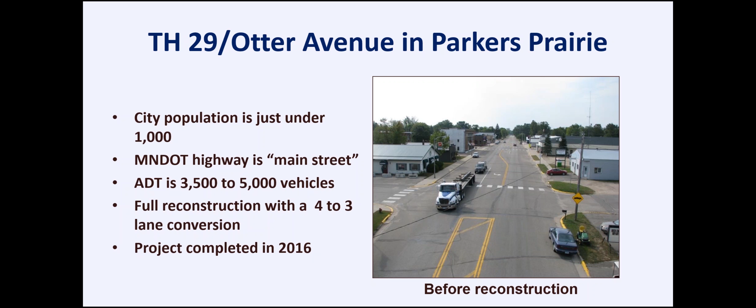Parker's Prairie is primarily agricultural, manufacturing, and service employers in their town. They're quite unique in that they have elementary, secondary, and high school in a town of just under 1,000 people. The MnDOT highway is Main Street, with 3,500 to 5,000 vehicles a day. After putting together this community vision, they convinced MnDOT that they wanted not a mill and overlay, but a full reconstruction with a 4-to-3 lane conversion. This project was completed in 2016.

The goals for the project were somewhat similar to Battle Lake. They wanted more of a vision for community reinvestment in their town. They definitely wanted to make it easier for kids to cross the road and get to the community pool and parks, and for people to be able to get around in a safer manner. They wanted a more beautiful downtown, and they wanted to upgrade the utilities underneath the road.

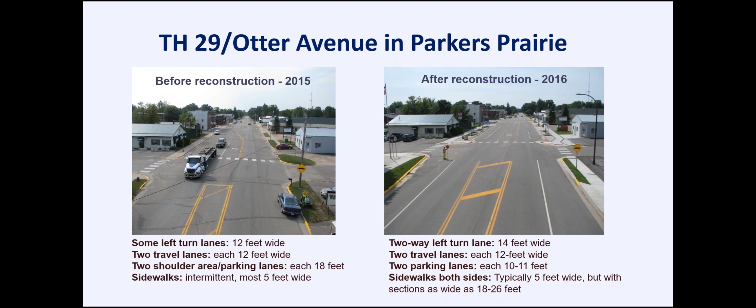The before and after picture is a little unique. In the beginning, in 2015, the road was not really a 4-lane, but it had such wide outside lanes and a parking lane that it sometimes functioned as one, even though it wasn't striped as a 4-lane. You can see this is in the south part of town. I'm looking away from downtown, so it's not exactly the picture I'd like to show you, but this is what we have in terms of before and after.

MnDOT has landscape architects, and a very talented guy there helped the city think about the design of their sidewalks, pulling in the design of one of the pretty downtown buildings. So they have some very nice bump-outs in town. They also got a Community Roadside Landscape Partnership Program grant for the plantings and trees. A woman in town who's a master gardener helped organize a big planting day, and I think they're very pleased with the results. The downtown looks very beautiful and functions well.

The roadway functions very well now, and crashes are down, as they were in Battle Lake.

Quick question. You mentioned that manufacturing was big in Parker's Prairie. Were there considerations that went into the project to make sure it could accommodate special traffic or something related to that?

Right, the movement of trucks is always a concern, and that was one of the reasons the center turn lane is probably wider than it really needs to be. But these were the early days of these projects, and thinking about the movement of trucks through town caused them to widen that center turn lane to 14 feet, which maybe it wouldn't necessarily have to be. I'm not an engineer, but I know that's not the actual requirement. Still, that's an example of how they modified the project.

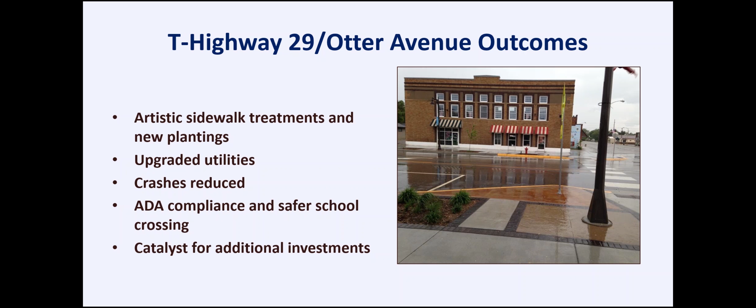So, anything else I wanted to mention? In the Parker's Prairie example, another community where this initial vision and the success of their redesign leads to more projects in the future, and they're looking now at slow reconstruction of the road going in this direction, which is Sioux Street within downtown.

Trunk Highway 65, called South Broadway in Albert Lea, is also a MnDOT highway and a community main street. Population of Albert Lea is a little higher, 18,000. Average daily traffic is about 7,000 vehicles a day. The project was completed in 2015, again a 4-to-3 lane conversion.

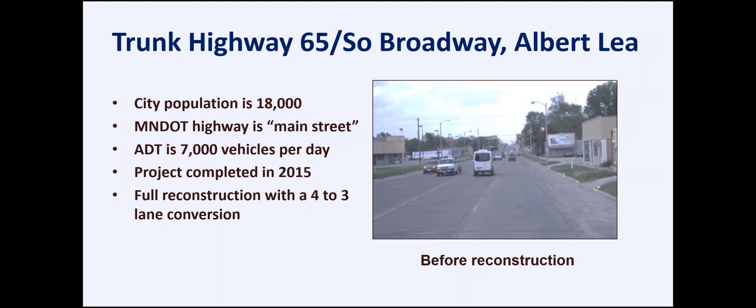Like Battle Lake in 2009, the situation in Albert Lea did not seem as rosy as it is today. Population had been declining, downtown had a growing vacancy rate, and at that time the city decided to participate in something called the Blue Zones Project.

I don't know if any of you have read a book called Blue Zones by Dan Buettner. Dan Buettner is a Minnesotan, and he wrote a book about the healthiest places around the world, the healthiest communities. He began to look for a place where they could implement some of these ideas he learned in writing the book, and they picked Albert Lea.

The community really embraced this idea of community well-being, healthy living, healthy eating, and reducing tobacco use. They did a lot of major community planning and visioning processes in their town, and the first reconstruction was a big redo of their downtown. It was a $4.5 million project, and that was the kickoff of Blue Zones implementation.

After that project, they said, all right, now it's time to move on to South Broadway. North Broadway was in downtown; South Broadway is the project we've written the case study about. Again, it was a 4-lane, and they wanted to improve safety in the corridor.

This is actually a before picture, before the reconstruction of South Broadway. So you can see the before picture. Often we forget—you have to remind me, please take a before picture when you're going to do these major projects, so that when we talk about them later we have really good images.

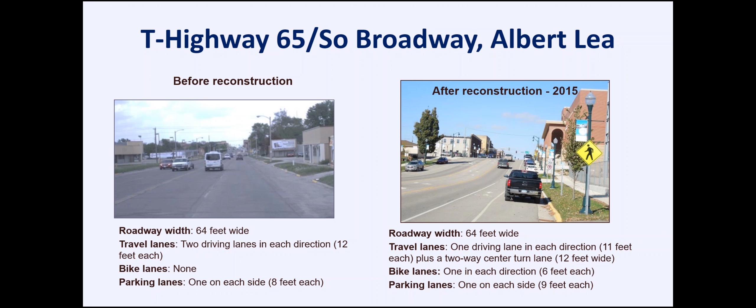This is at the south end of South Broadway, looking north into downtown. You can see this is one of the communities that did make the decision to put in a bike lane, so they have bike lanes on both sides of the street—again, another 4-to-3 lane conversion.

The town is really having a real renaissance, I think the town would tell you. These various projects have built on each other, and they finish one and are ready to move on to the next. Their downtown looks great. They have outdoor dining now, which they never had before when they had narrow sidewalks, so summer feels very festive in downtown Albert Lea. They've connected up a really nice trail system there, and on the corridor we did a case study on, vehicle speeds are closer to posted speed, and crash rates have improved.

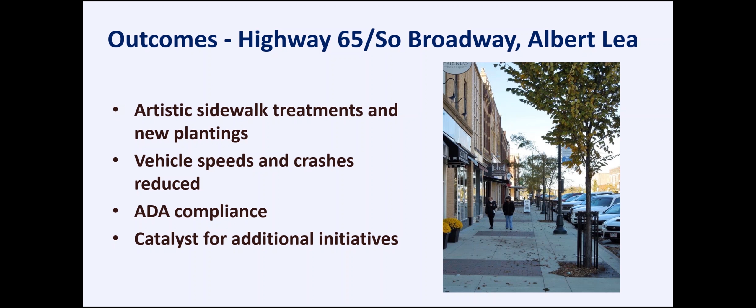I also wanted to mention a couple other projects. I think we will write this one up, but it just finished at the end of the season, and we didn't have time to get out there and get really good photographs. But Maryland Avenue in St. Paul has a 1.3-mile segment between Payne Avenue and Johnson Parkway, carrying 21,000 to 23,000 cars a day—the highest traffic volume I'm familiar with in Minnesota. I might be missing something in Hennepin County that has more.

In 2016, there was a very tragic crash—all crashes are tragic, but this one in particular, a mother was dropping a child off at a bus stop, and returning to her vehicle, she was hit and killed on this road. It had been a 4-lane, and there was a big community process afterward to talk about what could be done.

The proposal for reconfiguration went out for public review: to take the same 40-foot wide cross section, which had 2 lanes in each direction, and restripe it as a 3-lane with a center turn lane. They also installed a couple of pedestrian medians at pretty significant crossing locations.

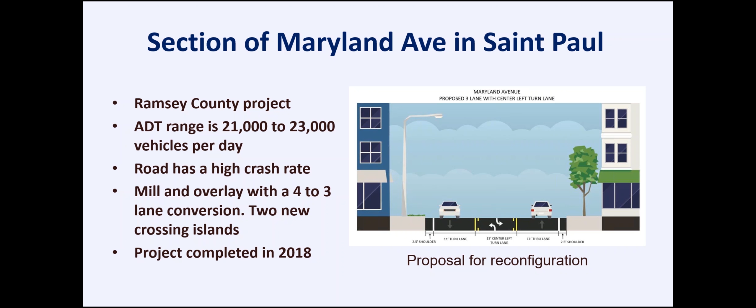When I talked to the engineer at Ramsey County about this project, I asked him, that's a significant amount of traffic every day, how is it working? He said it's congested 2 hours a day, an hour in the morning and an hour in the afternoon. There is traffic congestion, but he said it works better 22 hours of the day. I thought that's a good outcome, and it's just so much better to cross than it was before.

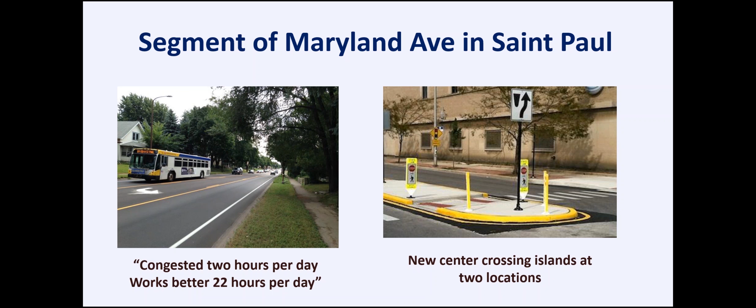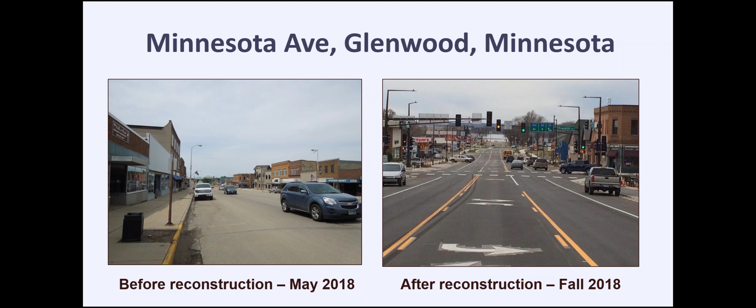Well, I don't know if it's too interactive. It's a community roadside landscape grant. Is that from the Department of...

Transportation? Yeah, it is. I know just a little bit about that. Within MnDOT, there was a community landscape partnership program, run out of the Office of Environmental Stewardship. If you went to the MnDOT website and searched that, you'd be able to find it fairly easily. I think it's through David Larson's unit, so you might find it searching that name. That's a program that partners with communities to plan and design different kinds of landscape treatments as ways to improve some of that part of the community.

Keeping in mind that landscaping is more than planting, more than just adding trees and shrubs, it's about functionality, and we've talked some about that. Part of what we're trying to achieve with right sizing is improving the multifunctionality of the right of way. It's more than just people getting around from A to B. Rain and snow, we have ways that we can deal with managing stormwater that are better than maybe just typical hardscape solutions.